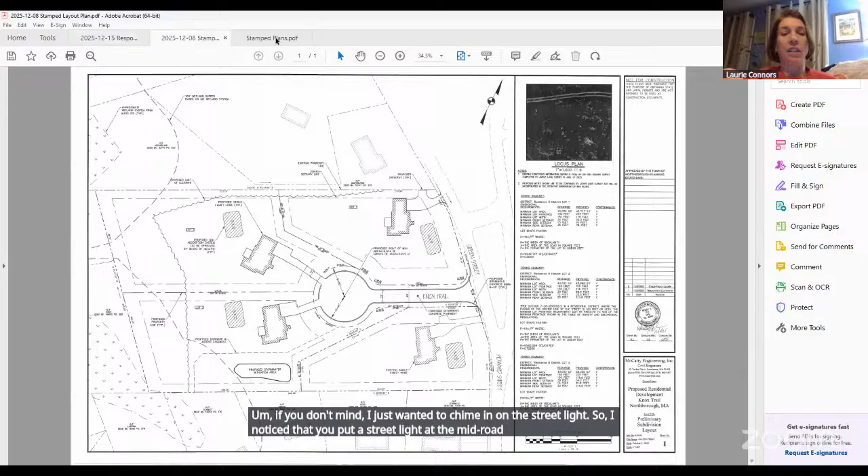Laurie, do you want me to keep going? If you don't mind, I just wanted to chime in on the street light. I noticed that you put a street light at the mid-road length and then at the cul-de-sac. I was wondering, is the reason why you didn't put one at the entrance of the cul-de-sac because the light at the intersection of Green Street and Howard Street lights up the entrance? I wasn't sure.

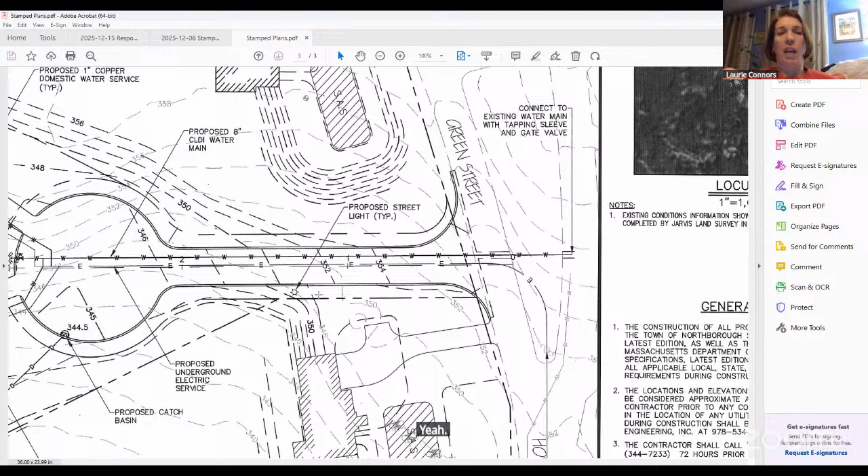So we can shift this one a little bit, but the intent was that with the light at the intersection, some of that spillage will get to the entrance of the proposed subdivision road. Verify that, because I'm not typically there after hours, so I haven't driven by there, but I wasn't sure whether the light would extend all that way. If it doesn't, my preference is that you move that light a little bit closer to the intersection.

I know typically with the lighting plans, when we submit the photometrics, it's 0.0 foot candles at the property lines. So whatever we would submit as part of the lighting plan would show the foot candles up to the property line. So you would ideally be at, call it 0, maybe 0.1 right here. And then it's anticipated that the light at the intersection would make up the difference.

Because I know towns typically don't like to see spillage, especially into the streets, that was why we pushed it back here, but we can shift it accordingly as needed. We'll defer to the boards and the town if there's a preference.

The lot one driveway is one of the other open items in the condition I'd like to go back to. The fire department issued an updated letter, again acknowledging a lot of their comments were the same from the previous submission, with a couple additional safety comments, which we fully acknowledge. One thing I'd like to reiterate, they did have a comment on blasting. Again, we don't anticipate blasting to occur on this site. If for whatever reason blasting is required, appropriate permits would be filed with the fire department.

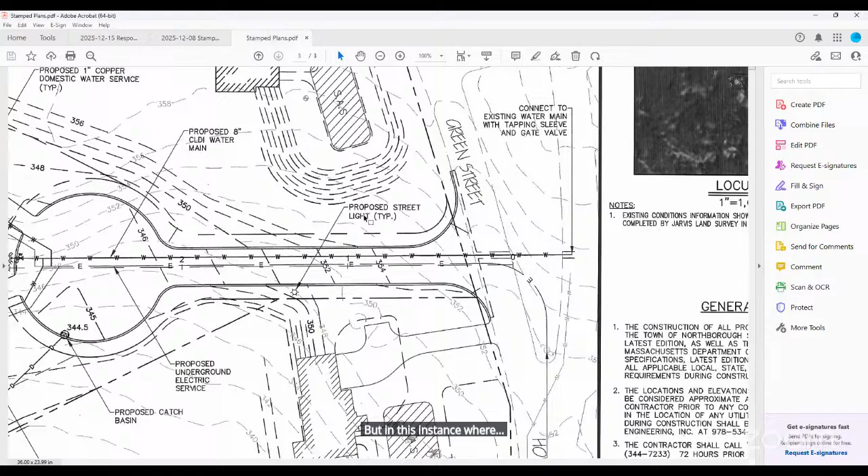But the trade-off is that you get open space beyond the developed area that is left open. So the idea of the OSRD works, but in this instance, as a development, this is the entire overall area, and we're only putting in 3 lots — one that's the frontage lot, and then two additional in the back. It really isn't conducive to do an OSRD for this type, where we are limiting our development for the grading, but we're also giving that land to the single family homes so they have yards and additional area they can use.

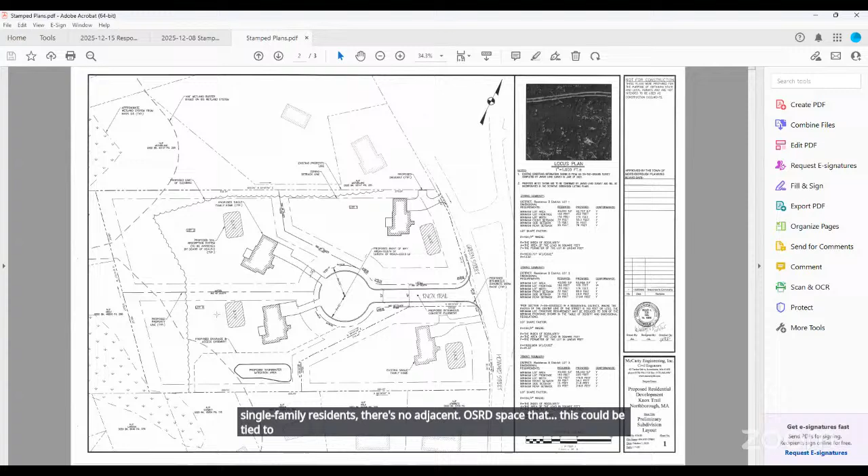So this one's a special case where it's its own little pocket. That's really where the difference between your typical large subdivision development and an OSRD would be more beneficial for that type of project than the couple lots that we're proposing here.

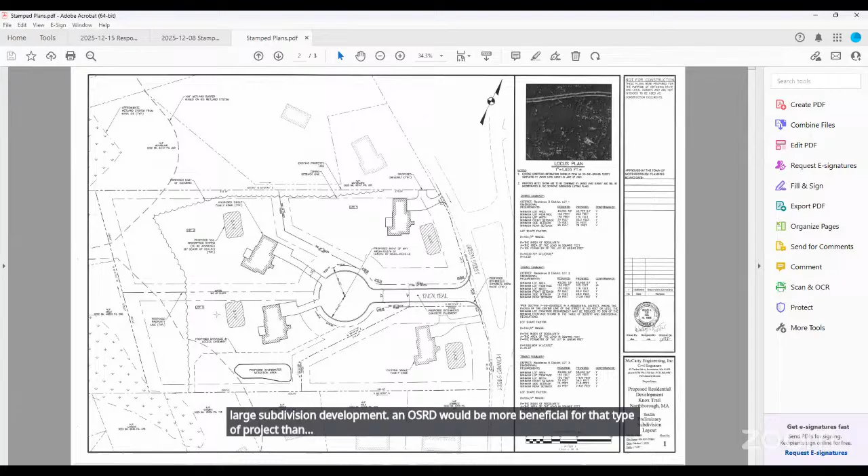And then lastly was Northborough DPW. Their comments were pertaining to the design of the road. Right now we show everything on the grading plan graded so that drainage comes down to one side to the catch basin here. They're asking that we revise the design to a typical roadway where it's crowned in the middle and sheets off to the gutter lines on each side. That's a revision we can do, crowning it in the middle so water comes both ways as it comes down the cul-de-sac. It'll just mean an additional catch basin and manhole to tie everything in, and still convey it to the proposed stormwater basin.

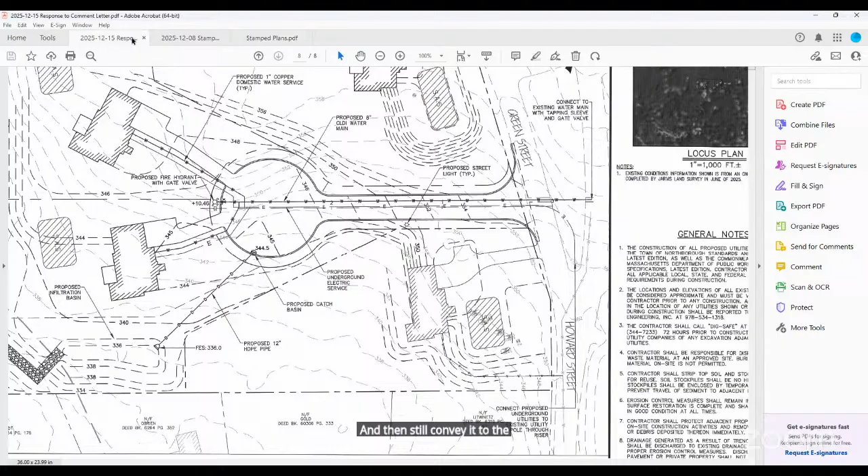The hydrant location, we can move that pole accordingly between driveway openings and the hydrant, and we can look at this during the definitive. Essentially they just have a comment pertaining to the proximity of the proposed roadway and the existing driveway for the single family home here.

Again, on the comments, we're satisfied with everything that was submitted back to us. We're okay with everything, either acknowledged or things we can definitely take a look at as we move through the process. So this is Laurie's draft conditions of approval.

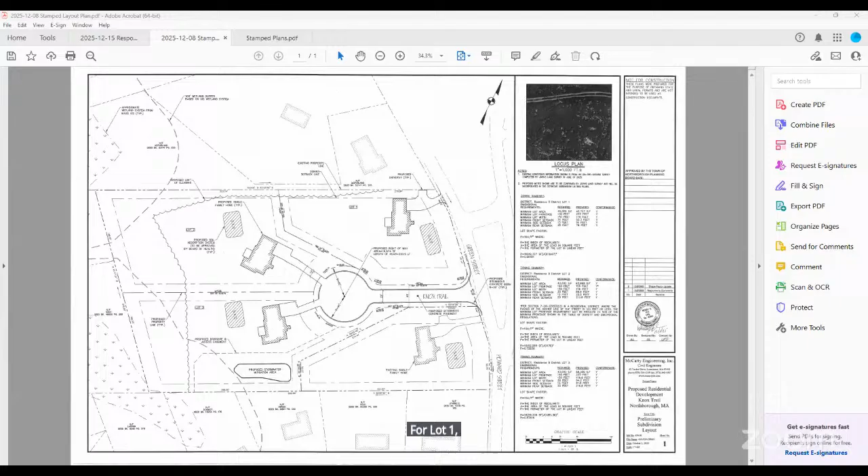The only two items she has highlighted here in red are condition 3 pertaining to the sidewalk and condition 6 pertaining to the scenic road for the driveway for lot 1. To remind the board, that's pertaining to the driveway up here.

Now, we had talked originally in the first meeting, and the question was brought up, could the driveway come and tie into the cul-de-sac here? We're open to the idea of doing that. We would like during the definitive process to really analyze that, see if there are alternatives, and bring that back in front of the board to come to some middle ground. So we're not opposed to the idea, but we'd like to iron that out with the board during the definitive process.

And pertaining to the sidewalk, while I'm on this plan, right now we don't show sidewalks on the road. I know there was some back and forth on whether it should be, maybe on one side instead of all the way around. So at this point, I'd ask the board what their feeling is regarding that waiver, one way or the other. We'd just like to know so going forward in the definitive we can appropriately accommodate that into the design if required, or take that into consideration as we look at different aspects for the definitive.

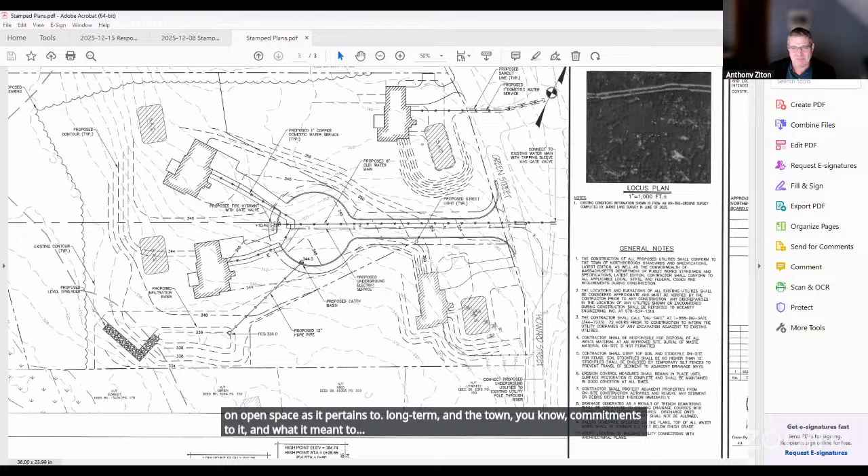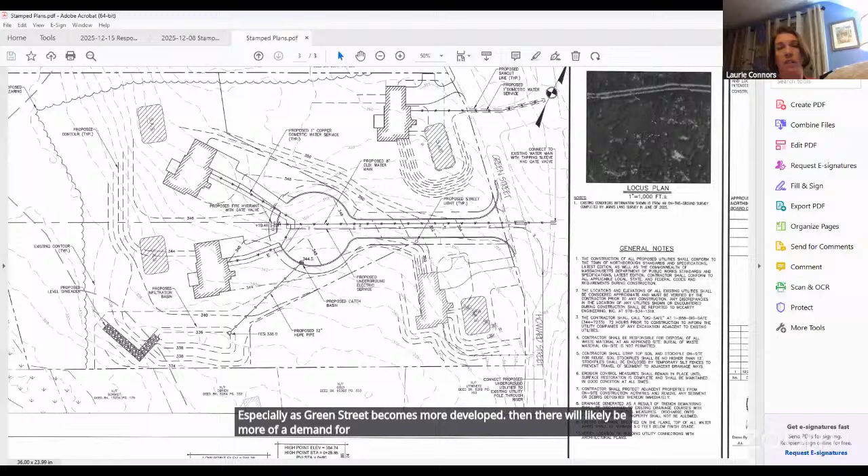So as far as I know, on the Complete Streets prioritization plan, we didn't have a sidewalk on Green Street listed. However, that doesn't mean that in the future there may not be a desire to put a sidewalk on Green Street, especially as Green Street becomes more developed. Then there will likely be more demand for a sidewalk. So I, for one, always like to see sidewalks whenever we can get them constructed by a developer.

In this case, my argument is they wanted to have a 22-foot wide roadway, and my suggestion is to go down to 20 feet. So there would be some savings on impervious surface by going with a narrower street width that could then be applied to the sidewalk, making it 5 feet wide. So it would be a slight increase in impervious surface, but by regulation the street is supposed to be 26 feet wide. So actually there would be a savings by having only a 20-foot wide roadway and a 5-foot wide sidewalk—you're still saving 1 foot over what is required in the subdivision regs.

Steve, do you have a preference on this, if you want to chime in? I think you're still muted. All right, how's that? Yep, we got you.

Yeah, so we'll do whatever you guys want. If you want the sidewalk, we'll do it. We were originally thinking no sidewalk on the basis that this would be more of a private road serving two houses only and not invite the public down it. That was really the basis of it.

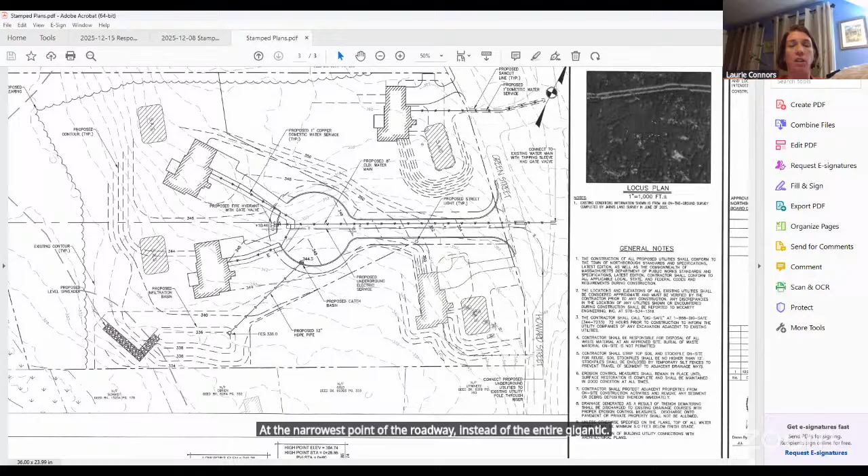Okay, so this isn't going to be a thoroughfare by any means, but yeah, it's only two houses at the end of the bulb. So I think if the board's amenable to it, we can do sidewalk on one side of the road, and then during the next phase, we can iron out the details on how it should be around the bulb. But if that's the way the board's leaning, I think that would be a fair middle ground.

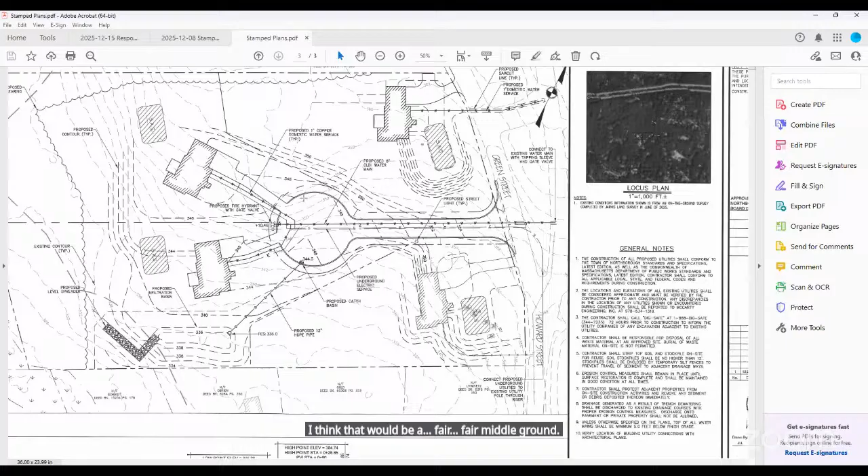Steve, you on board with that too? Yeah, I think so.

I guess one of the things we wanted to explore in the definitive is the size of that bulb. Right now it's pretty large, so I'm wondering, depending on what the fire department's okay with, and if the planning board's okay with, reducing the bulb.

So the important consideration is the tower, the fire department's tower truck. If you could demonstrate that the fire truck can make it around that cul-de-sac, then you could go smaller, I would think.

I'd be interested in hearing what the board members think. I'm fine with that. I'm fine with that too.

And that was gonna be one of the things we sit down and confirm with the fire department, make sure they're good with that. But the idea would be shrink this, we can go down to 20 feet per fire regs. And then this bulb, I have to run the actual truck turn to make sure it fits, but my thought would be maybe a 35-foot radius, shave 10 feet off of it.

Another possibility is you could put an island in the middle, and you could even collect stormwater, so you could do maybe a rain garden in the center of the cul-de-sac. So you could reduce impervious surface and treat your stormwater at the same time.

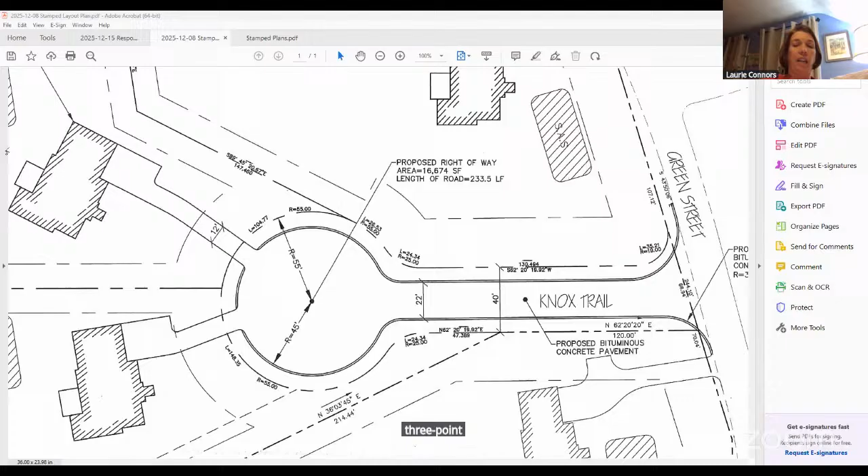I think we're reading into his comment about the 3-point turn a little bit, assuming that if we demonstrate he can do a 3-point turn in a reduced bulb, he might be okay with it, but we haven't had that conversation with him yet. We were thinking we'd do that. When the question came up earlier about a hammerhead, I think Justin mentioned it's like when you put an island in the cul-de-sac, the vehicle has to be in a specific spot. Even with a hammerhead turnaround, you have to have the front and back of the vehicle exactly in it, as opposed to if they'd be happy with a 3-point turn in a bulb that's not as large as what we show right now.

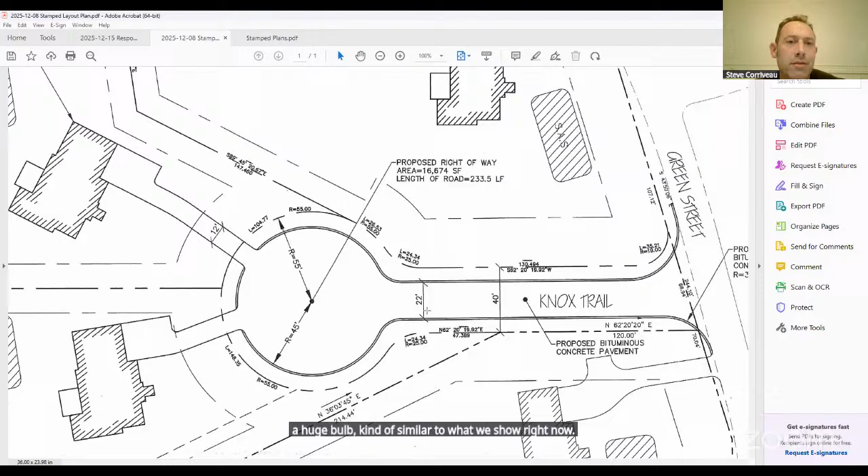I think it's more functional for everybody, because everyone gets deliveries now at their houses, so we want to make sure we have enough space for those type of vehicles to get in and out of the cul-de-sac. But if they want the fire truck to come in and out without stopping or backing up at all, it's going to require a huge bulb, similar to what we show right now. I think that's really what's going to determine it.

We've had other fire departments be okay with that. So that'd be something I could put the figure together for the fire department, send it over, or even go sit down with them and make sure they have buy-in. Or maybe it's not 45, maybe it's 38, and they can drive around completely, smaller than what you're seeing here, but not as small as what we want, and it makes everyone happy. So as long as he's good with the 20 feet and okay with the rest, we can neck this from 22 to 20.

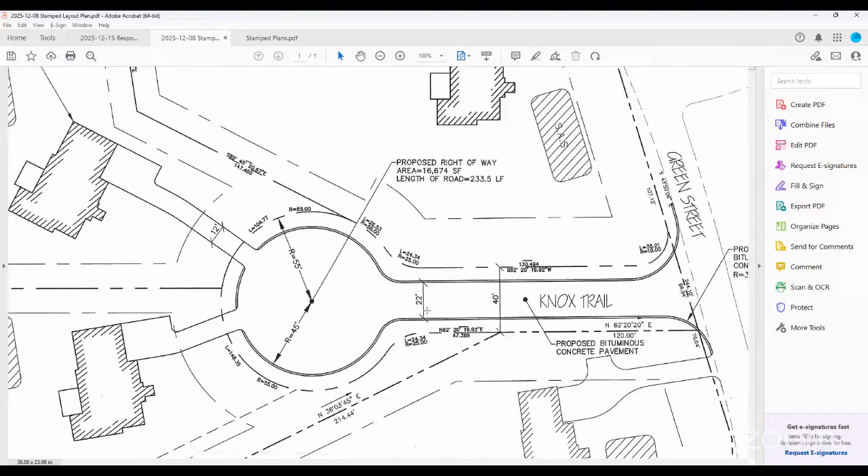I think so, are we good with this for now? One side has a sidewalk around the bulb. They're going to explore reducing the size of the bulb.

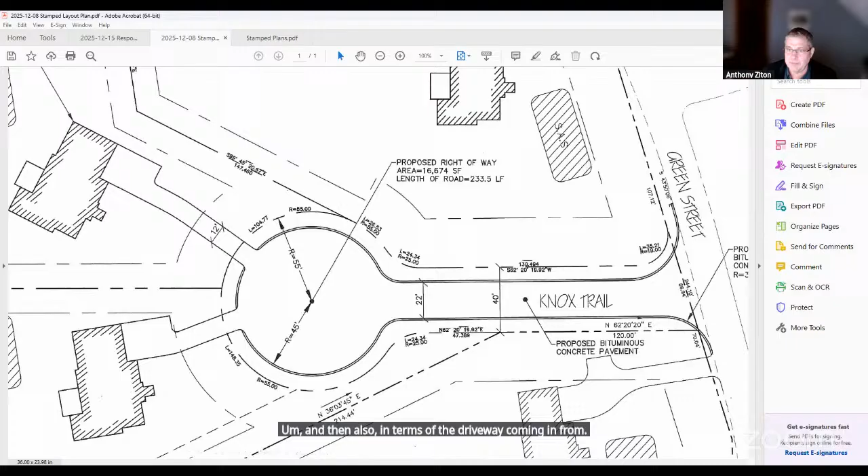And then also in terms of the driveway coming in from Knox Trail, they're still undetermined, which will be in the definitive, I assume. Yes. I'd like to sit down with Mr. Corvo and really hash it out, potentially come up with some other alternatives during the definitive for that layout, and one way or the other, show the board why or why not, and really have that discussion. But like I said, we are open to looking at it and trying to see if we can make it work.

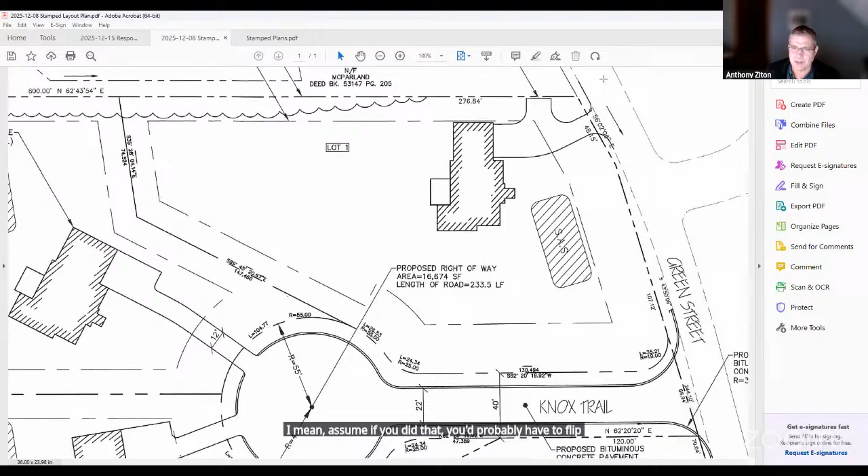I'd assume if you did that, you'd probably have to flip the house in another direction. Yeah, and that's some of the stuff we'd have to look at regarding the septic design and the grades, because that part of the site does climb up a little bit, about 10 feet through here. So the grading, we'd have to make sure we can get the grades to work with the house as well as maintain the septic design and grading as approved and required. There's a lot more going into it than just saying we can flip the house and the driveway and make it work. But again, we can definitely look at it and see what we can do to make it work. And if for whatever reason we can't, at least bring those findings back to you guys during the definitive and say, this is really all we can do, and at least show you that.

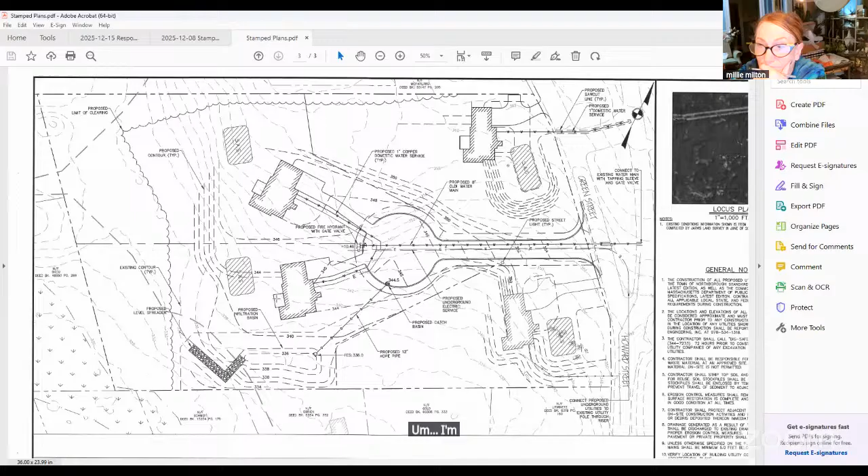Millie, do you have a comment? Yeah, not about this - I want to review that basin that you have. I'm really concerned that it's really close to somebody else's house, and you're sending all the stormwater from these two sites to that location.

Is there a reason why you didn't put it in the back? Again, trying to limit the amount of disturbance and work that we do, and trying to keep the development as tight up front as we possibly can, was one of the reasons. I did look at this again - I think I had mentioned it at the first meeting when we started talking about this - with the topography, everything comes down this way and the low point is back here in the corner. So we could look at spinning this and having it run.

Turn the basin this way a little bit more so it follows the natural grade. And then again, this would be a level spreader to help dissipate any potential overflow. But we still have to go through the full drainage design, make sure the pre-post numbers work, that the basin is sized adequately for the 100-year storm, and make sure we don't have something that will overtop and flood the abutting properties.

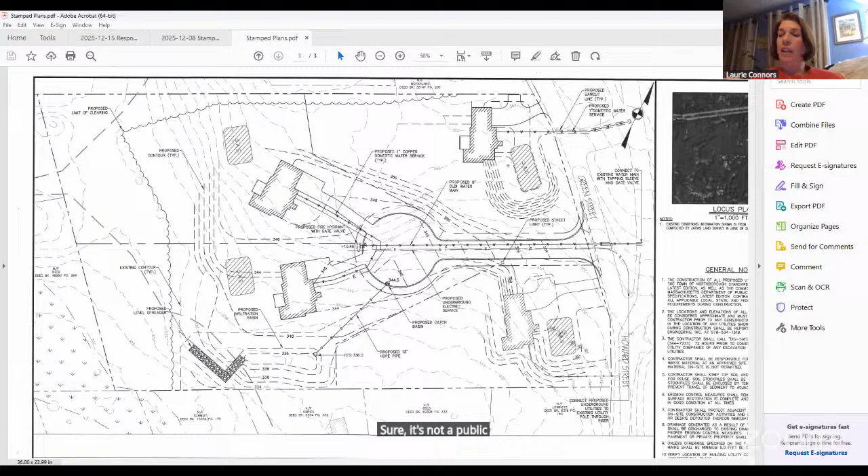Hey Laurie, would we take any public comment here if there weren't any? Sure, it's not a public hearing, but it is an advertised public meeting. So I don't see anybody with their hands up, but if somebody wants to speak, certainly they can. Not seeing anybody either, okay.

So anything else from the board? Any other comments or questions? No, that drainage item was really just going to be the one I was going to ask about, so thank you for covering that. No problem. And again, everything else that was in Laurie's draft, we don't have an issue with. It is what it is. The big thing I just wanted to make sure the board was okay with was us reviewing lot one during the definitive a little bit more, and it seems like you guys are, so I do appreciate that.

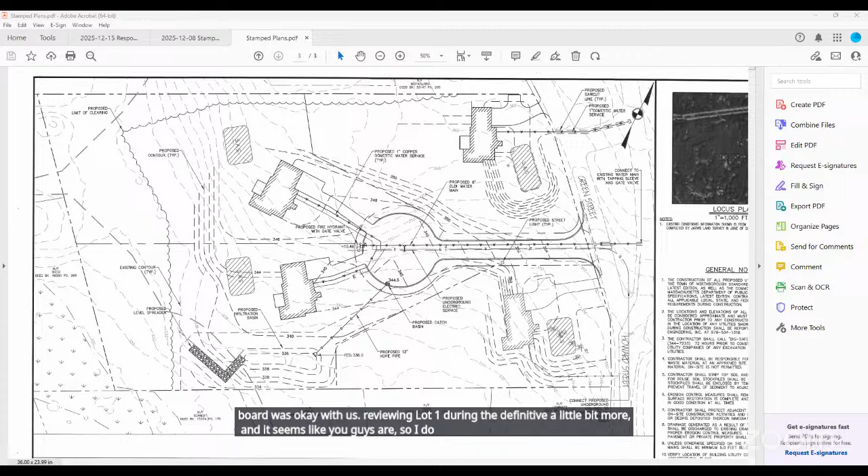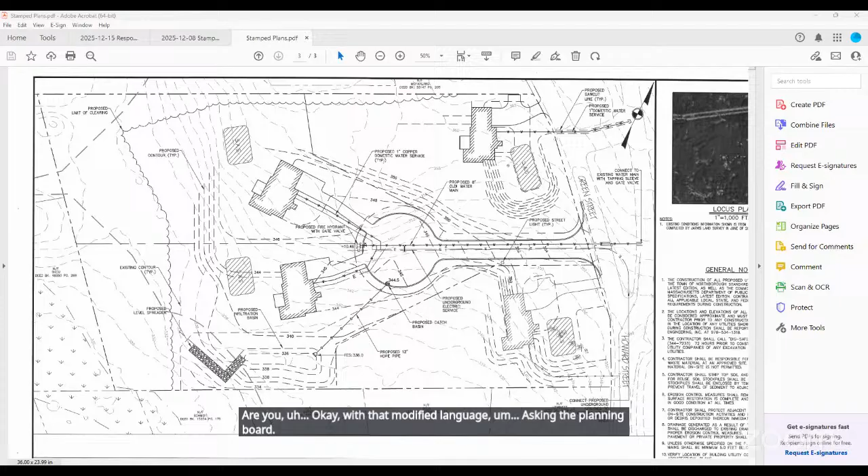Okay, good. So I guess we can just move to motions at this point, is that correct? Yeah, and I can also modify the wording of number 6 to read: the applicant should consider shifting the driveway for lot 1 so that it obtains its access via the proposed subdivision roadway instead of Green Street. Are you okay with that modified language? Yeah, I think that's fine. You said number 6? That's number 6, in the conditions. Oh, in the conditions, gotcha.

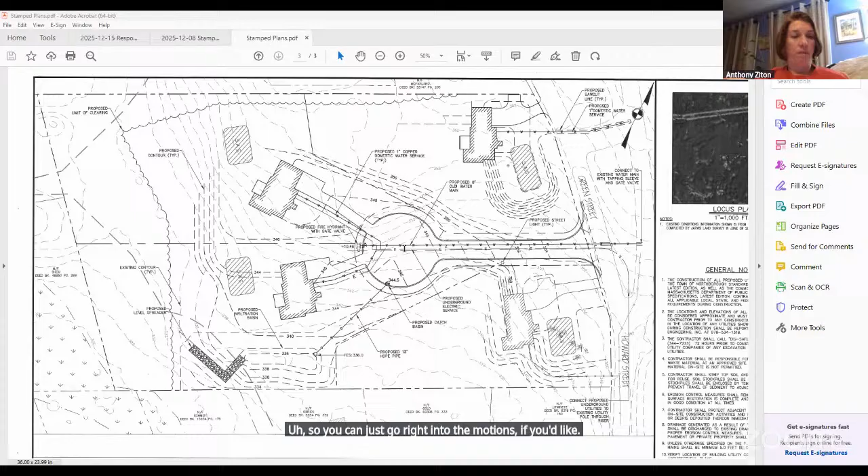Okay, all right, considering there's no other questions, I think we just go right through the motions at this point, do I have that correct? So it's not a public hearing, so you don't have to close the public hearing, you can just go right into the motions if you'd like. Fair enough then. All right, do I have a motion to grant a waiver from subdivisions section 10-36-050B1 to allow for right-of-way width of 40 feet?

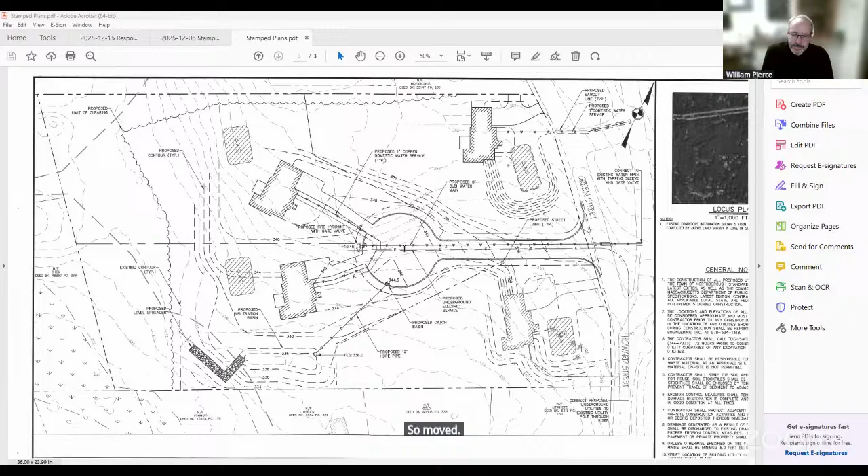So moved. Second. This is a roll call vote. Bill Pierce, aye. Millie Milton, yes. Carter, aye. And I am an aye. And then do I have a motion to grant a waiver from subdivision rules and regs, section 10-36-050B3 to allow a traveled way width of 20 feet?

So moved. Second. Okay, this is a roll call vote. Bill Pierce, aye. Millie, yes. Carter, aye.

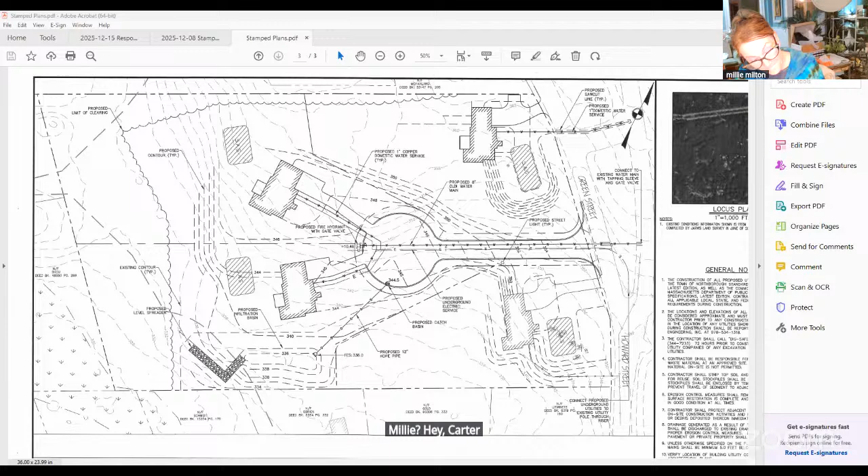And I'm an aye. Do I have a motion to grant a waiver from the subdivision rules and regulations, section 10-36-060, to allow construction of a sidewalk along one side of the proposed roadway only? So moved.

Second. Roll call vote. Bill, aye. Carter, aye. Millie, yes. And I'm an aye.

Do I have a motion to grant a waiver from subdivision rules and regulations, section 10-36-080, requirement to set aside an open space area?

So moved. Second. Roll call vote. Bill, aye. Carter, no. Millie, yes. And I'm an aye.

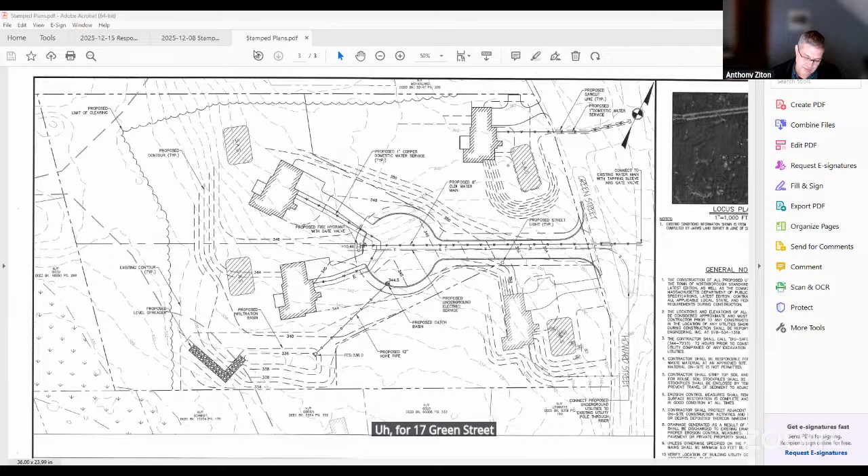And then lastly, do I have a motion to approve the preliminary subdivision for 17 Green Street, map 37, parcel 13, as depicted on the plan entitled Preliminary Conventional Subdivision Plans, Knox Trail for Corvu Development, LLC, 17 Green Street, Northborough, Massachusetts, dated October 2nd, 2025, last revised December 8th, 2025, prepared by McCarty Engineering, Inc., subject to findings of fact 1 through 9 and conditions 1 through 20.

So moved. Second. Roll call vote. Bill, aye. Carter, no. Millie, aye. And I'm an aye.

So this isn't a super majority, is it, Lori, for preliminary? It's just a regular majority vote. Okay, fair enough. So with that, I would say preliminary passes.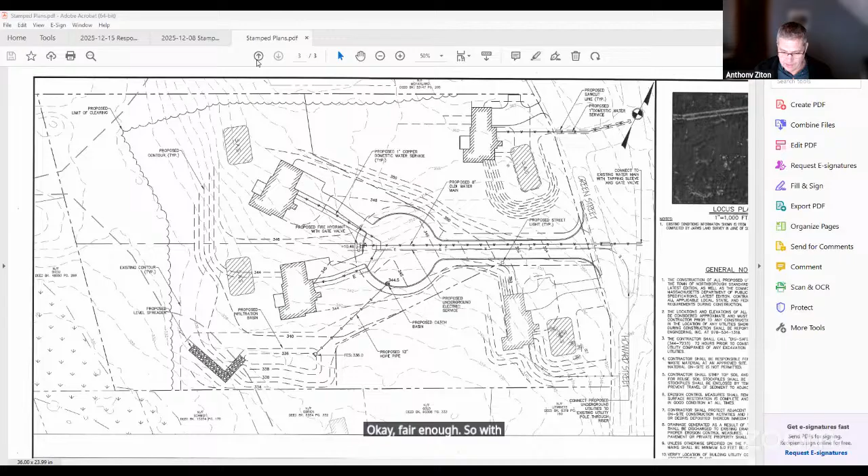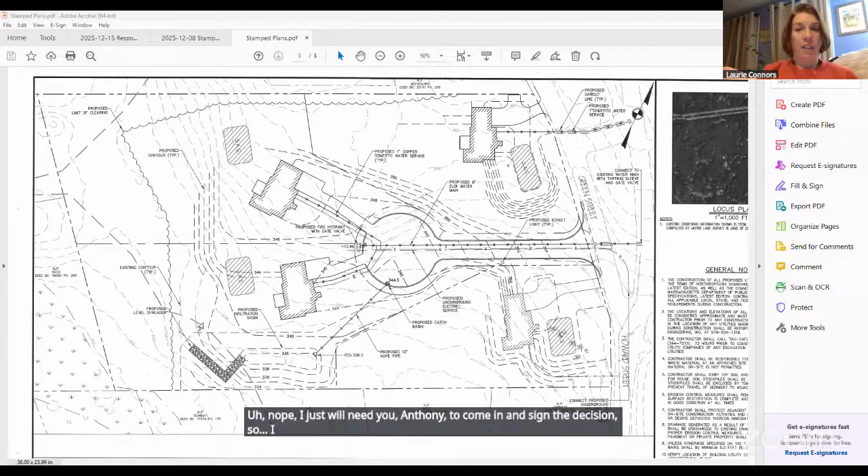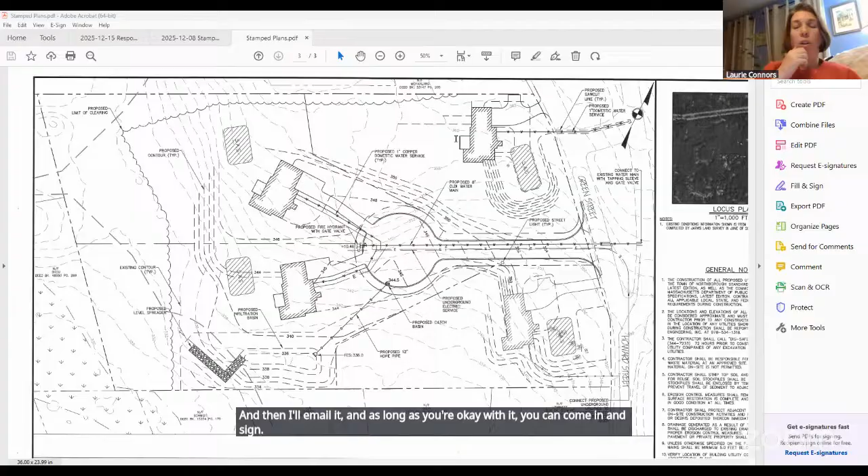Anything else we need to say about it, Laurie? Nope, I just will need you, Anthony, to come in and sign the decision. I will modify it per tonight's discussion, and then I'll email it, and as long as you're okay with it, you can come in and sign hopefully this week sometime.

Will do. All right, thanks, gentlemen. Awesome. Thank you very much. Have a good evening. Good night. Thank you.

Okay, next on the agenda is a public hearing continued to consider the special permit per groundwater protection overlay district bylaw and site plan approval for 9 Goddard Road, map 17, parcel 9. And who do we have from the applicant?

Right there, okay. So we have John Sullivan, possibly the D52, I think that's Don, they're all raising hands, and Scott Harrison. A couple that won't move over. Okay, one more. Okay, that should be everybody.

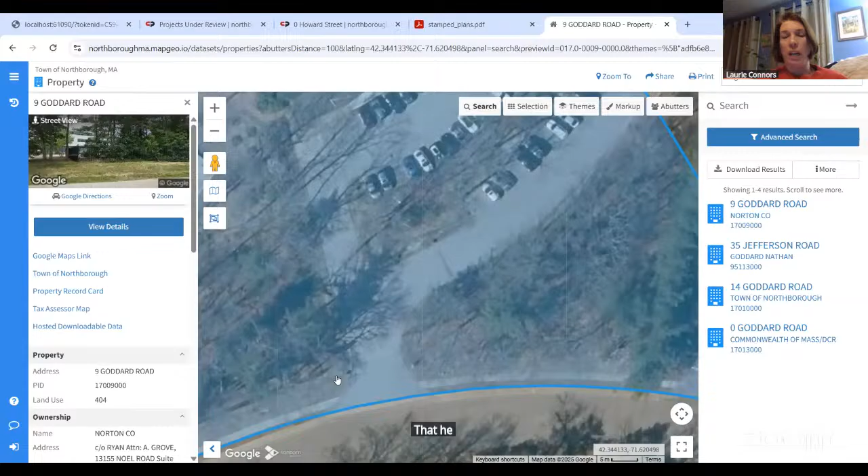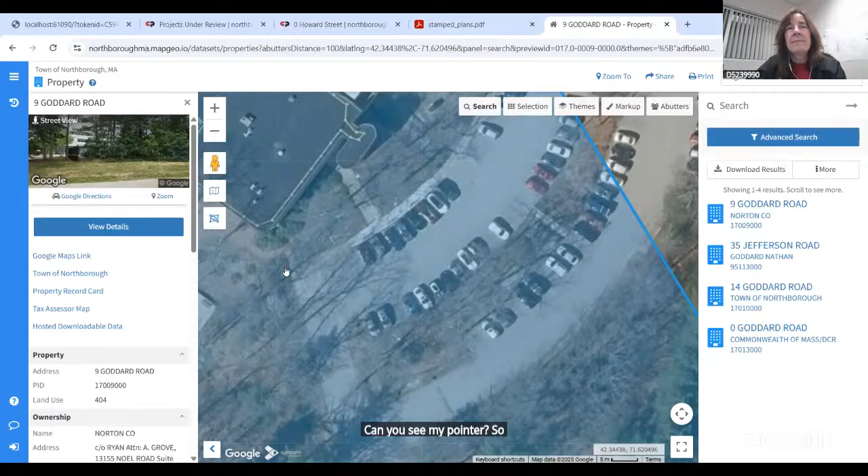Yeah, I'm looking at the aerial photo, which I can share my screen. So it's my understanding of what Carter's saying is that he wants walkways alongside this driveway that connects to the parking lots and ultimately into the building. So you have a walkway right here - can you see my pointer? So you would do a walkway that connects this sidewalk to that sidewalk. Is that correct, Carter? Is that what you're saying? Yep.

Again, if there's future things happening, it can wait until then. I just wanted to make sure that if those future things don't end up happening, there's something that would improve the safety of pedestrian access to the site.

Yeah, it would be great, to your point Laurie, if rather than doing it right now, we do it when we incorporate the other crosswalk associated with the parking lot across the street. Is that possible? I think so. Just have this on your radar for when they do that.

Carter, you good? Yeah, that's fine. Thank you.

Next one is improve access to each structure for fire and other emergency service equipment. Any concerns there? No concerns.

Reduce visual intrusion by controlling the visibility of parking, storage, or other outdoor service areas viewed from public ways or premises residentially used or zoned. No concerns.